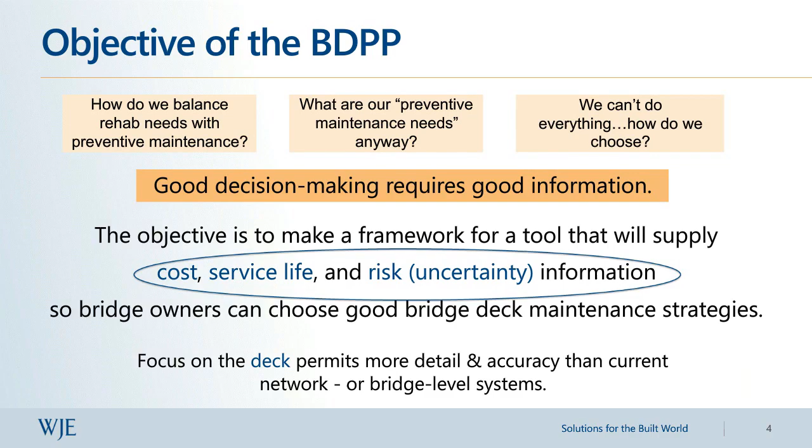As I indicated, phase 1 of the project is completed, and TAC is currently working on developing an RFP for phase 2 of the effort, which will take the framework we've developed here and make it into either a computer-based or a web-based portal for state DOTs and county engineers to access and use.

In this presentation today, I will first discuss the theories and basically the framework that we developed. Then in the second part of the presentation, I will give some examples to illustrate how this logic that we built can be used.

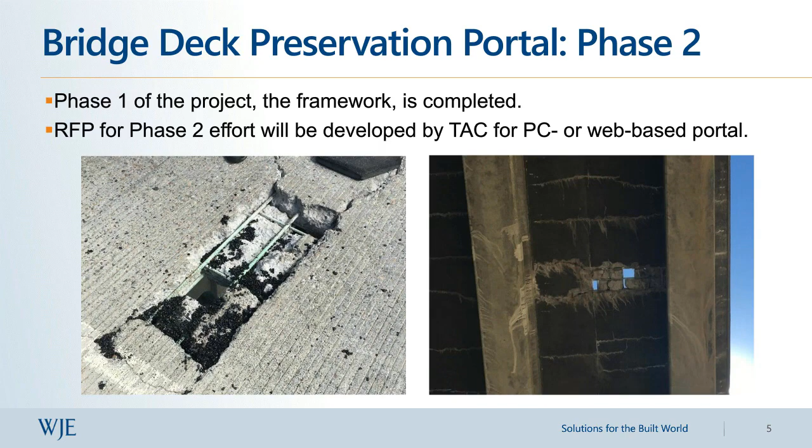So for our tool's general framework, the user will need to collect some information about their asset and basically input it for the tool to work. This will include physical description, exposure conditions, deck condition, and user preferences and constraints.

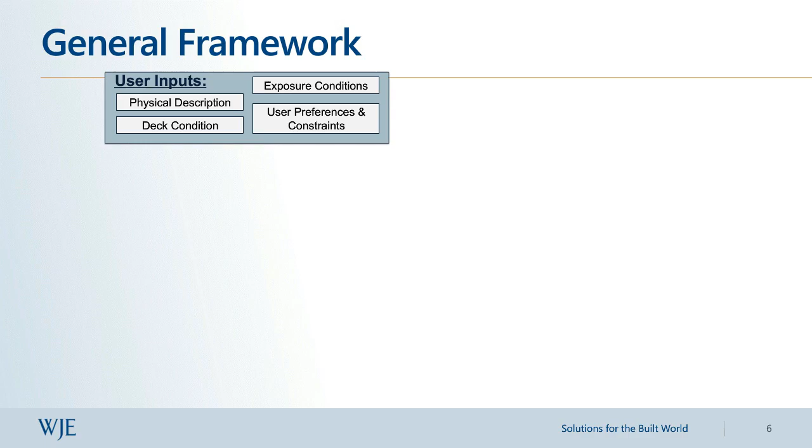Once the user has these inputs in, then we compiled—and I will explain this in detail later in the presentation—a list of all the different maintenance activities that can be used based on the type of the bridge deck or the degradation condition.

So for structural decks, if it's concrete, we focus on collecting maintenance actions for chloride-induced corrosion. If it's steel, we're also focusing on corrosion. If it is timber, we're focusing on decay.

For wearing surfaces, the main deterioration we are targeting here is abrasion or skid resistance. So using the inputs, the portal has brains and logic to basically recommend some maintenance activities to the engineer. The engineer will still be able to add any maintenance activities, even if they are not recommended by the portal, in the analysis, or take out some of the maintenance activities that were recommended by the portal, but the engineer

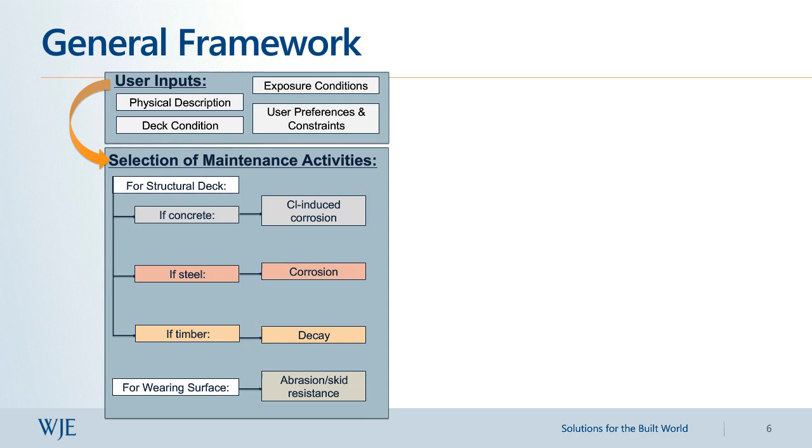doesn't want to consider. And once you have the user inputs and the maintenance activities, then the portal has some algorithms to calculate some of the specifics about the analysis. And these are basically the service life extension estimate. So for each maintenance activity, there will be a calculation of how much service life that activity will extend your bridge with. And then this combined with deterioration modeling can give you a full picture of how long your bridge deck can remain in service using these different maintenance activities.

And finally, we can do a life cycle cost analysis. The results from all these three algorithms are then compiled into an optimization module. And from here, the portal will develop some outputs for the engineer. These outputs will include a list of maintenance activities that are ranked by life cycle costs, agency costs primarily or user costs, service life extension, initial cost, and data variance as well.

One thing to note is data variance will be an output because we are using a probabilistic model, and we are doing probabilistic analysis in this study, and I will explain this later on, which will basically start with a service life extension estimate, which is a probabilistic algorithm.

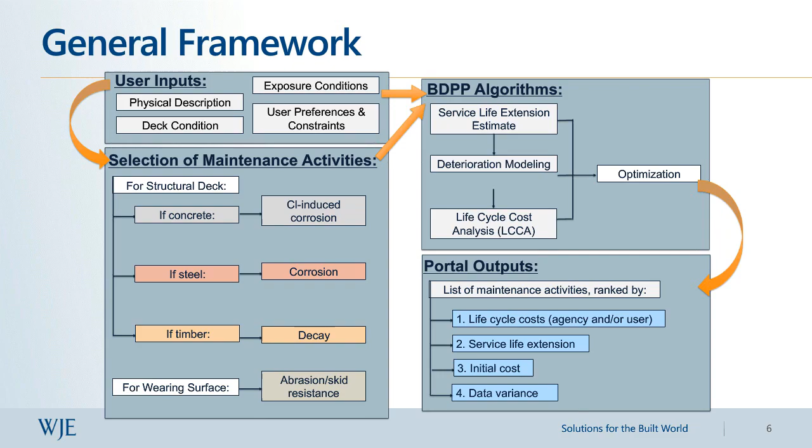So first, starting with the inputs, here I have some of the inputs that the portal needs to work. Starting with physical description, for example, the portal will need the year at which the bridge deck was constructed. And this will be mainly used in the DM or in the deterioration model module. We have other inputs here, which is the structure type, the surface area, and so on.

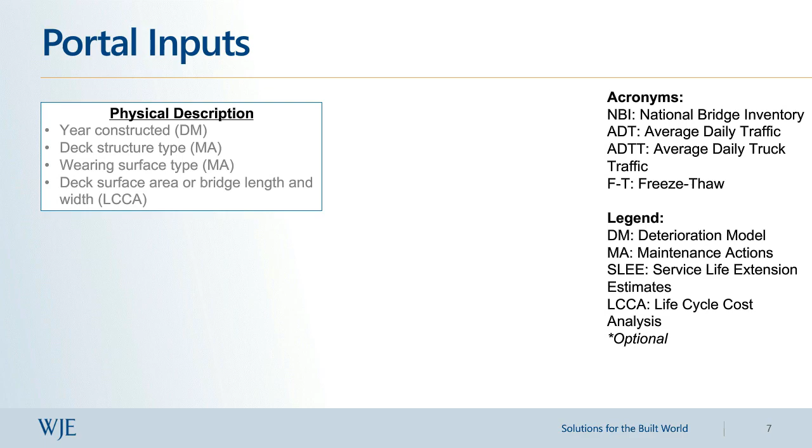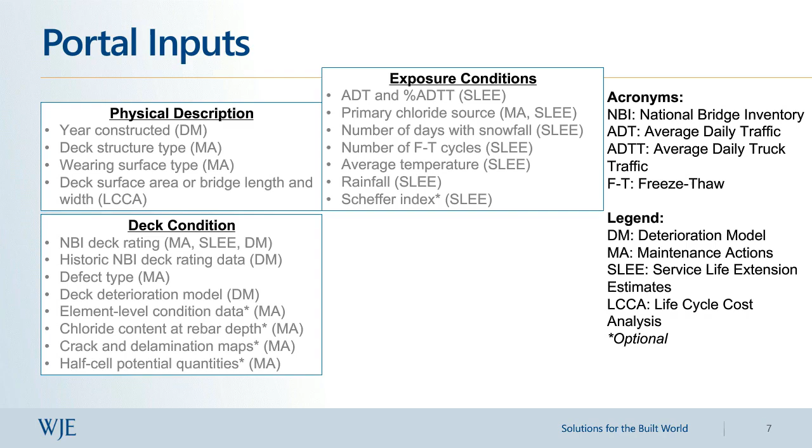Then we will also need some information regarding the deck condition. So, for example, we need the inspection or the NBI deck rating, and this will be used in selection of the maintenance actions and the service life extension estimates, and also in the deterioration model algorithm. Then we need information regarding the exposure conditions, which will basically be used in the service life extension estimate algorithm.

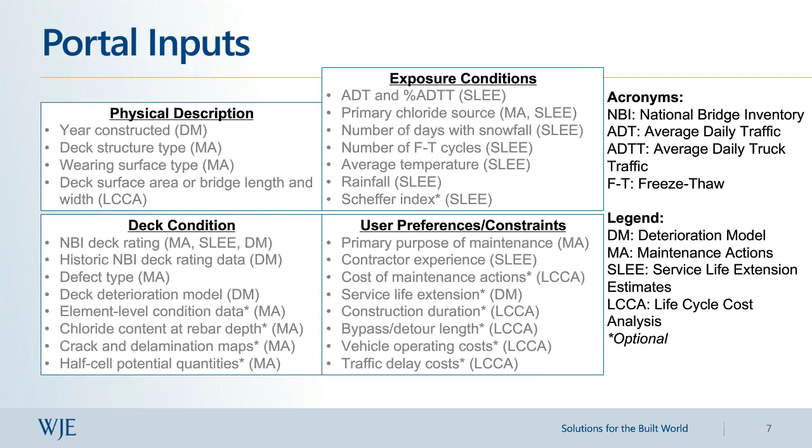And we also have user preferences and constraints. And you can notice that some of these inputs with asterisk are optional. So the portal will still work if these inputs were not put by the user. However, we recommend that as much information as we get will improve the results that the portal will output.

So once you have the input, one of the main efforts that we completed during this project was basically compiling a database for all of the different maintenance action techniques that can be used for bridge decks. And again, we divided those per structure type, as I'm showing here. So for concrete decks or wearing surfaces, we have 5 maintenance actions that we collected. For asphalt wearing surfaces, we have 3 maintenance actions. For steel decks or timber decks, we have 4 for each. And for overlays, we have a total of 10 different maintenance actions that we included in the database that's also included as an appendix in the report.

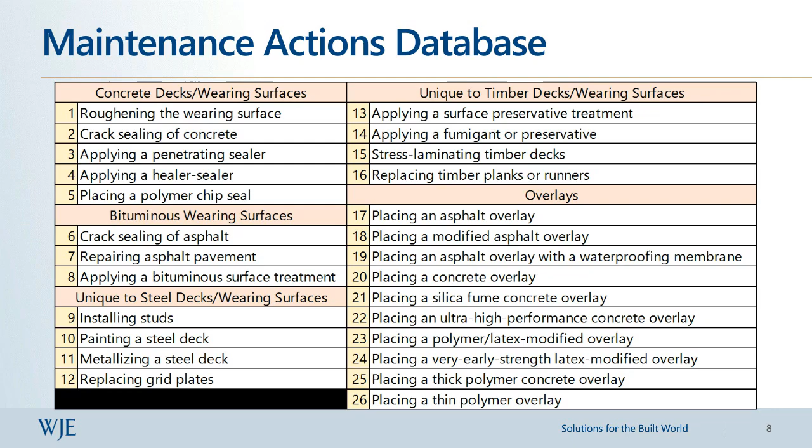So for each of the maintenance actions, we built what we call the maintenance profile. I'm showing here the example for placing a concrete overlay maintenance action. So each action will include general description and general procedures for applying that maintenance action. We also collected unit cost information from the literature. This will basically be used in the life cycle cost analysis.

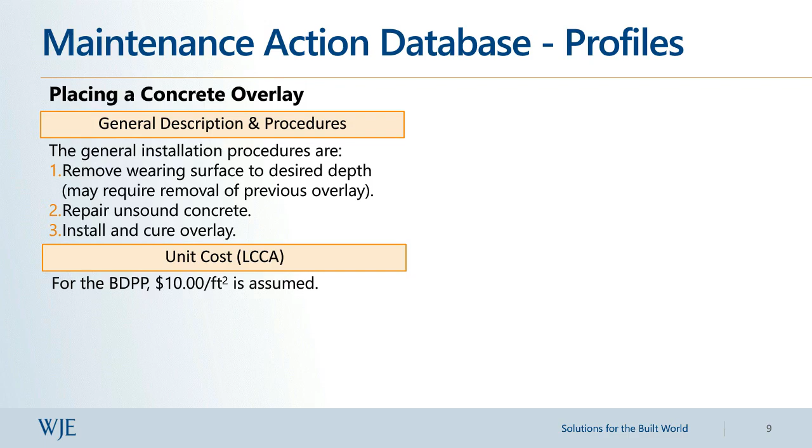One thing to note here is that cost information is very important because it's a big part of the decision-making process, and therefore we recommend that each state compiles their own cost information in a database and use it in this portal, because basically in the literature we found that there is a very large variance in the cost between different states depending on how much they use a certain maintenance activity.

And then we also collected service life information, which we basically found for this one is that there is a range. So the literature will say if you apply a concrete overlay, that will give you between 15 and 30 years for the service life extension. And I will show later how we are using this information. And then we have some exclusion filters, and this is basically the logic that the portal will use to recommend or exclude maintenance activities based on the inputs of the user.

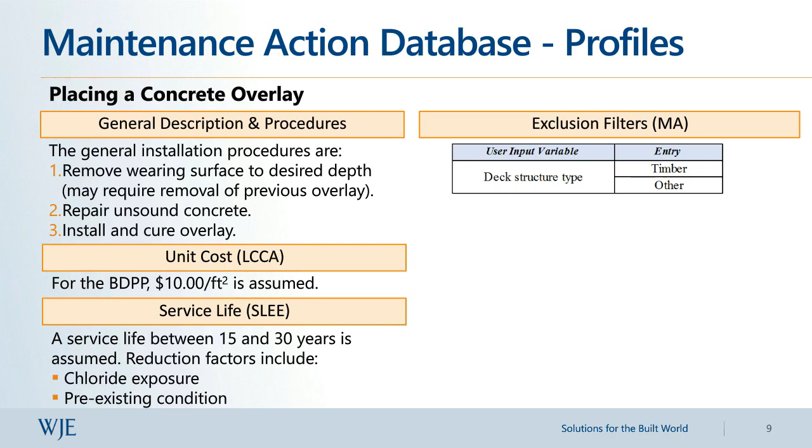And finally, we also included some thresholds for element level inspection data, and we got this mainly from the NCHRP 14-36 report, which was completed by Dr. George Hearn from the University of Colorado Boulder.

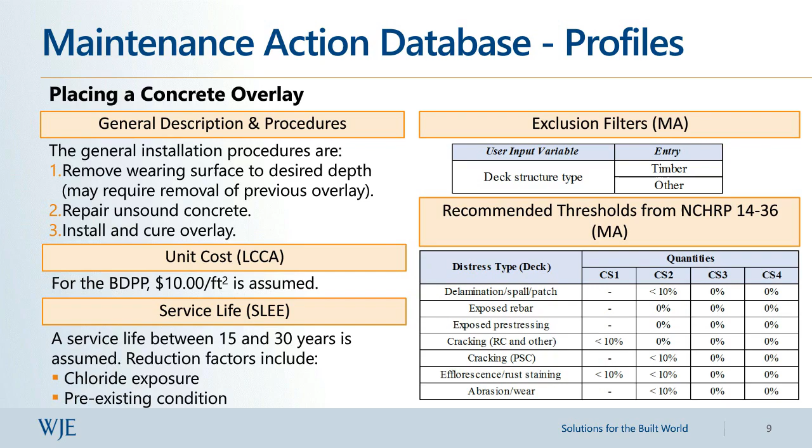Here I'm showing an example of exclusion filters. We have this for all of the different maintenance actions that we have for our portal. But as an example, for applying a penetrating sealer, if your NBI condition rating is 6 or 5, the portal will not recommend this action. And even if the portal doesn't recommend the action, the user will still be able to select that action for further analysis if they would like to.

Same thing with the primary purpose of maintenance. If the user inputs that the primary purpose of maintenance is to improve the ride quality, then applying a penetrating sealer, based on our engineering judgment, won't help, and it will not be recommended to the user. But again, the user can still select that action if they would like to.

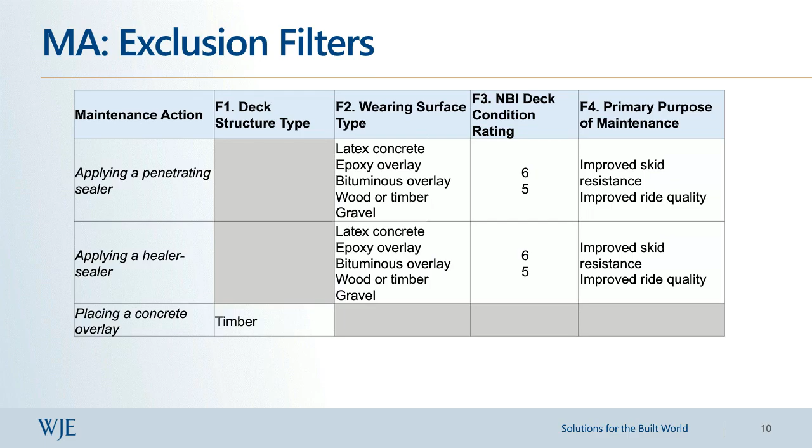Once you have your maintenance activities selected, a big part of this will be to know the service life extension that you can get from each of the maintenance activities. As I indicated earlier, from the literature, we found that for each maintenance activity there is a range. The assumption is if you apply, for example, a concrete overlay and your bridge deck condition is fair or good, and you don't have a lot of chlorides in your bridge deck, and the traffic is not too high, and your de-icing practices are not very severe, then you can get the 30 years service life extension that we found in the literature as the upper bound.

However, if your conditions are severe, you have high traffic, you have high chloride exposure, then probably your service life extension will be more towards the lower bound, which we found from the literature was 15 years. So what we developed here is an algorithm that, based on your exposure condition and the pre-existing condition of your deck, takes reduction factors and uses them to reduce the upper bound of each of the maintenance actions, and then compares that to the lower bound so that the multiplication of the reduction factors times the upper bound is not less than the lower bound.

One thing to note here is that the reduction factors I have listed here will not be used with all the different maintenance activities. For example, you may only use 4 reduction factors for concrete overlays. The reduction factors that we selected are one for traffic loads, which we call FADTT, and one for chloride exposure. We have a reduction factor for the pre-existing condition or the NBI rating of the deck. We have a reduction factor for the freeze-thaw cycles experienced by the deck. We have a reduction factor for the contractor experience. We have one for Scheffer index, which is mainly used for timber bridges. And we have a reduction factor for the average temperature and also the average relative humidity.

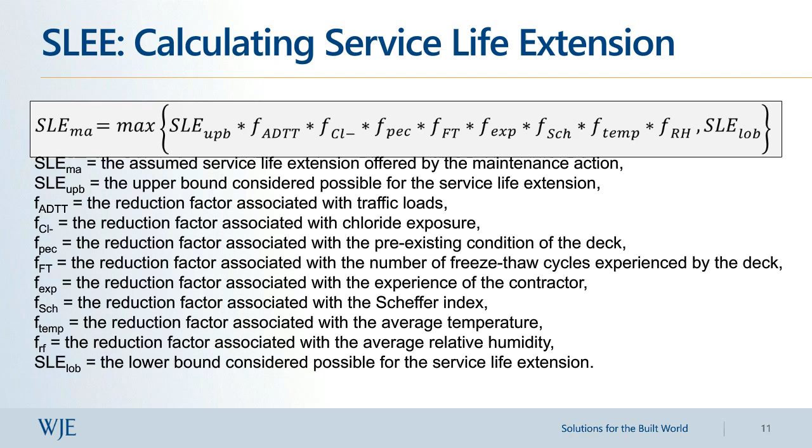So taking an example of chloride exposure reduction factor, we have 3 categories for this: low exposure, medium, and high exposure. The low exposure is when you don't have chlorides, or you're using deicers for less than 5 days in a year. And in this case, the reduction factor is 1, meaning we don't reduce your service life estimate for your maintenance technique because your exposure is low.

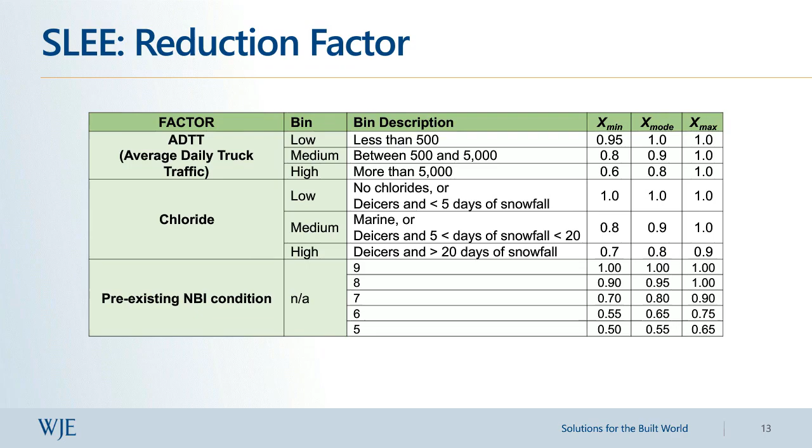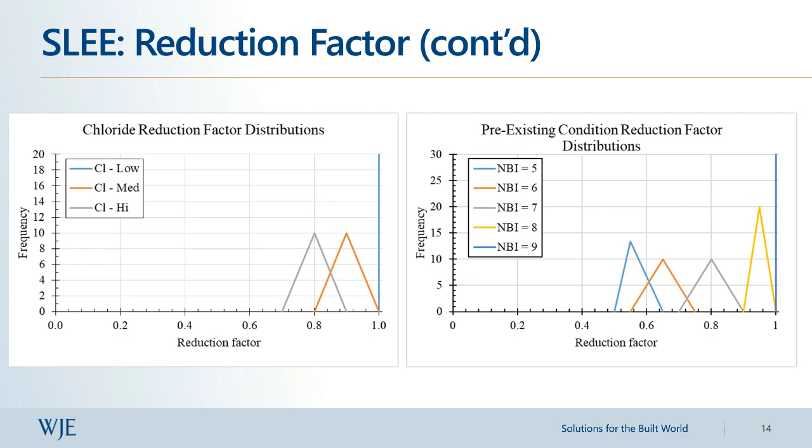When we looked at this, we found that there are 2 drawbacks for doing it this way. So the first drawback is we don't know how much improvement in the NBI rating we'll get. What we found in the literature is when you apply a maintenance activity, you basically extend the service life of your bridge for a number of years. And then the second part is that we know that when you fix your bridge or when you put the overlay, you are effectively reducing the deterioration rate. So it doesn't make sense to use the same deterioration rate as the original line.

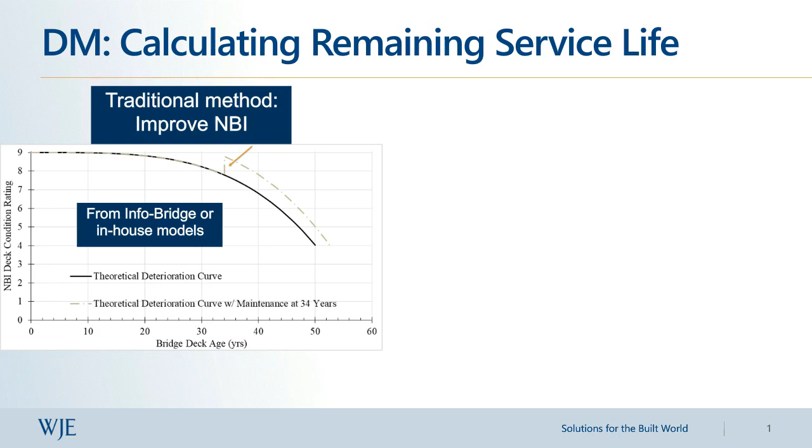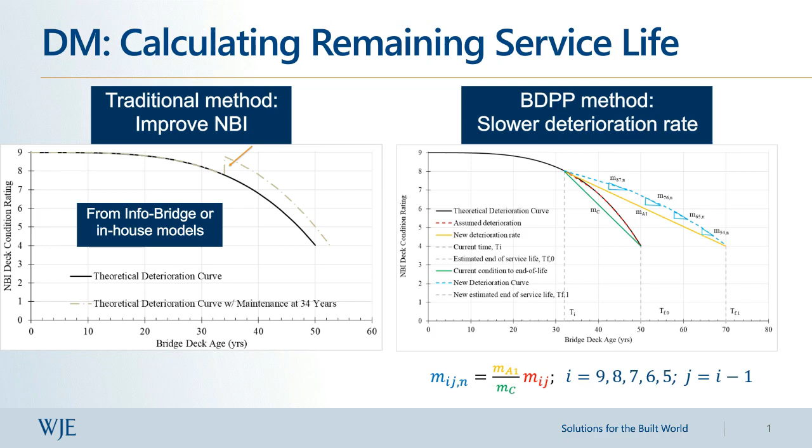If I take the ratio between these two deterioration rates, the new deterioration rate after applying the maintenance activity and the old deterioration rate if I do nothing, and multiply it by the black line, I can calculate this new blue deterioration curve, which is the deterioration curve of my bridge after applying my maintenance activity. So by doing so, we can basically get the service life extension, and we can also back calculate an improvement in the NBI condition as I'm showing in this figure. And then we can use some of these parameters in the optimization and in the selection of the maintenance activities.

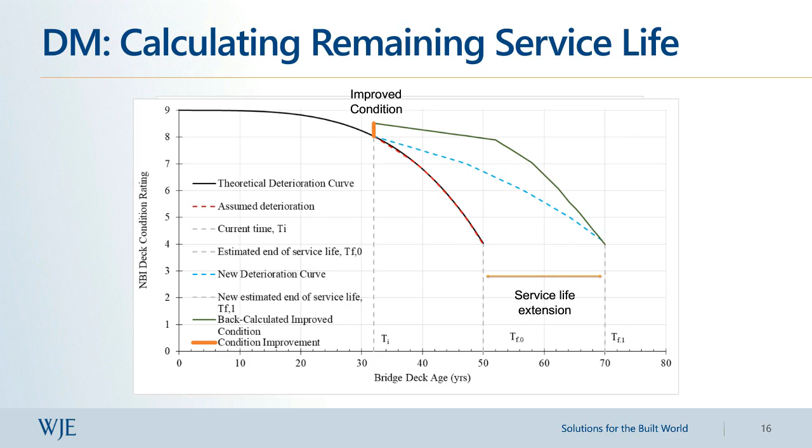Once you have this information, we can then do a life cycle cost analysis. And for this part, this is already well established. We looked at the literature and found that you can do the life cycle cost analysis using the agency costs. And sometimes people include the user costs, which is considered a good practice, and we recommend that it's being done.

However, for this, what you do is generally you have a maintenance plan. So you apply maintenance activity at a certain time. Then after 20 years, for example, in the future, you apply another activity, and then you replace the bridge. And you're basically looking at a certain time frame. Typically 100 years is what we are assuming in our project. And what you do is that you calculate all these different maintenance activities and replacement activities. You calculate how much they are in the future, and then you translate all this to what we call the present value, so the present costs right now, and you can compare different maintenance activity profiles using this technique. And I will show this later on in the examples too.

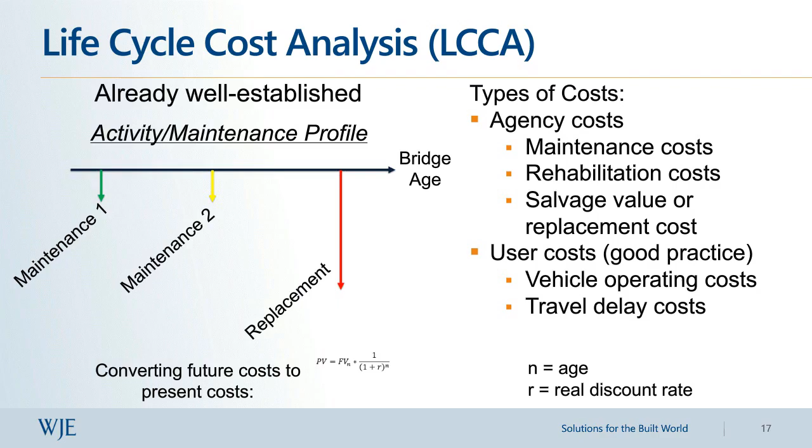Again, as I mentioned, we are doing all this in a probabilistic fashion, and what we recommend to use to do this is a Monte Carlo simulation. We're mainly following a probabilistic technique because we have uncertainties regarding the remaining service life due to inaccurate descriptions of exposure conditions, the assumption that we may have some compromised construction quality, and some inaccuracies inherent in the deterioration model.

Our main probabilistic analysis is conducted in the service life estimation algorithm, and then it goes on to the deterioration model and the life cycle cost analysis. We can have another level of complexity and probabilistic analysis if we want to put the costs also as a probability distribution. However, when we did the examples, which I'll show later by building a MATLAB code to do these analyses, we only considered uncertainty in the service life estimate, and we took the cost as just a deterministic value.

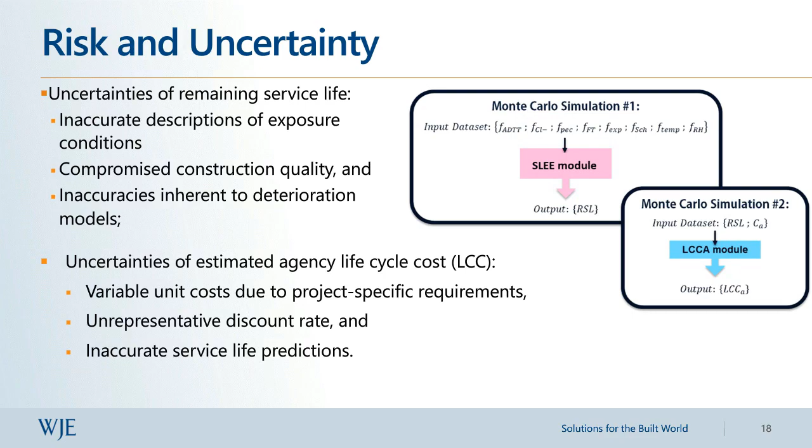Finally, the portal can optimize all these results based on the objectives that the user needs. We define 3 objectives here: minimize the life cycle cost of the agency, minimize the life cycle cost of the user, and maximize the remaining service life. The user can choose one of these objectives to optimize on, or we can combine these objectives using the linear weighted sum method, optimizing each individually and then summing this into one function, where the summation of the different weights for each optimization function should be equal to 1. I'll show this in the examples.

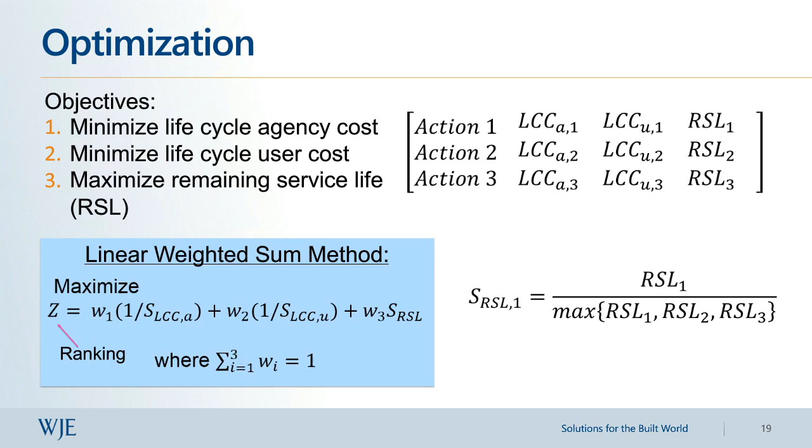Finally, we developed a technique to make maintenance activity plans automated and optimized. We know that in some cases, when preservation is considered for a bridge deck, usually you say, okay, I'm going to put penetrating sealer now, and then after 5 years I'll put an overlay, and maybe after another 20 years I'll put another overlay. In this case, you're not only considering the immediate action, but actually considering a whole maintenance plan through the service life of your bridge deck.

There's a way to do this, shown here: after the user inputs data for the bridge deck, the portal takes this input and goes through the filters and threshold module to choose some maintenance actions. For maintenance activity plan 1, it will be action 1.1; for maintenance activity plan 2, it will be action 2.1, and so on. Then these get put into the service life extension and deterioration model algorithm, generating new inputs, and go back to the filter and thresholds module to do actions 1.2, 2.2, and so on. So the portal can build maintenance activity plans and compare and optimize based on the whole activity plan rather than just the immediate preservation action.

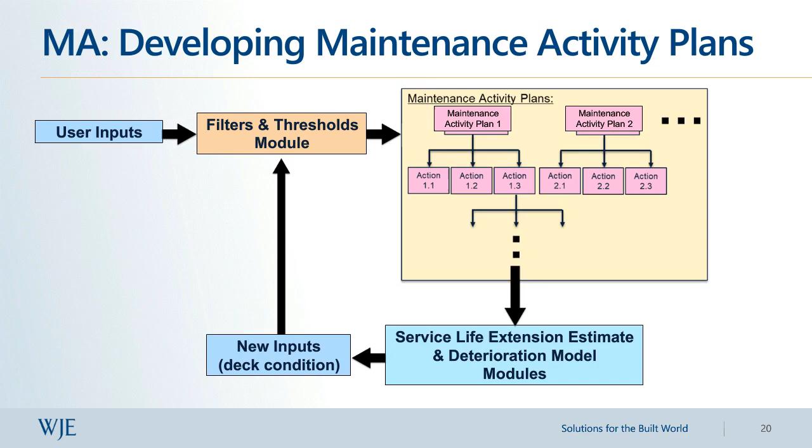So now going to the examples. Early on in this project, when we met with the TAC, we decided it might be a good idea that after we develop the logic, we run some examples to test it. We got 3 bridges from North Carolina DOT, Iowa DOT, and Oregon DOT, and did the analysis for all of them.

In order to do so, we had to build a tool to do the analysis. So we built, or completed, a MATLAB code that can do the analysis I described as an example, and ran all these example bridges to get the results, which I will show here. One thing to note is this is a preliminary tool - it's not complete, so there are some limitations to what we can do, but the service life extension, the deterioration model, and the life cycle cost algorithm are basically similar to what I showed in the previous slide.

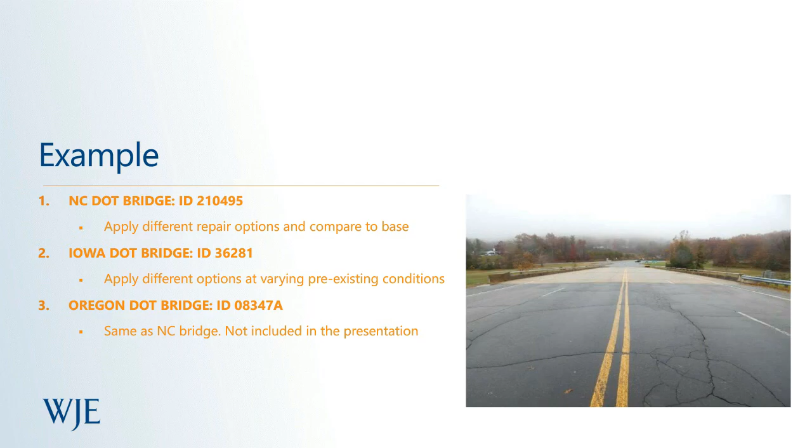So for all the examples where we only considered a concrete bridge deck, we selected 4 maintenance actions to be analyzed. In doing so, we didn't have to build a whole maintenance selection algorithm because we already know what actions we want to consider. And we calculated the life cycle costs for agency costs only, to keep it simple.

We considered 100 years for the life cycle cost analysis. The 4 maintenance actions we selected are a healer sealer, a hot mixed asphalt overlay with a waterproofing membrane, a concrete overlay or PCC or high-performance concrete overlay because they have similar characteristics, and a thick or pre-mixed polymer concrete overlay.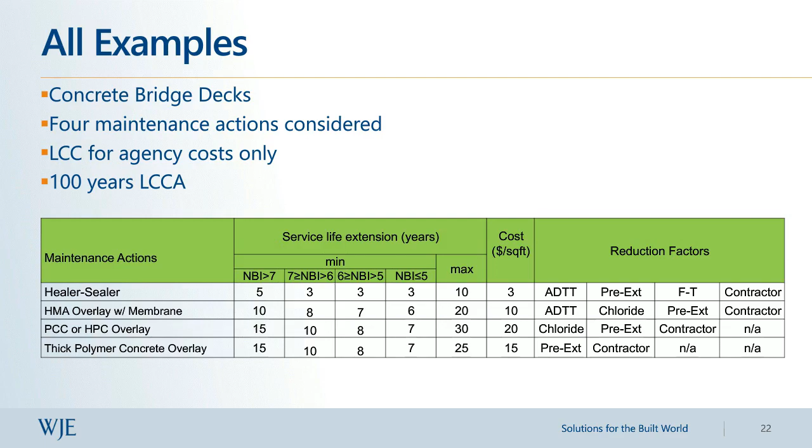We ran 3 examples, but for the sake of time in this presentation, I will only present the North Carolina and the Iowa DOT bridges.

For the North Carolina bridge, we got the inputs from InfoBridge, a website that FHWA has with all the information we needed. You can also get this information from inspection reports. For this bridge deck, the year constructed was 1979. It was built using concrete cast in place. We got the length and width information, and then the location and exposure conditions.

They used deicing salts for this bridge. The chloride exposure was medium, and the freeze-thaw exposure was low. We had the ADT and percent ADTT information to calculate the reduction factor for traffic loads.

We assumed the contractor experience risk is low, meaning the contractor is experienced in all the methods, so we don't need to put a reduction on the service life estimate due to inexperience of the contractor. We got the deterioration model, which is now available on InfoBridge, but at the time of this project, we got it from the LTBP portal. This is the deterioration model for the bridge deck.

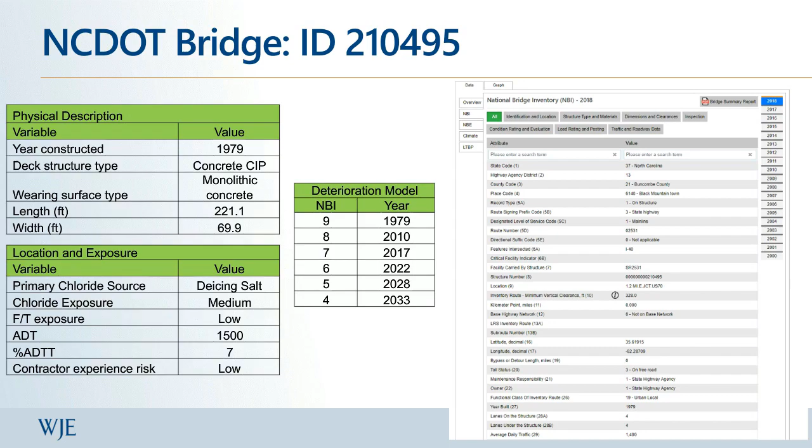We ran the example in our MATLAB program, and here are the results for the healer sealer and the HMA with membrane. The red line is the original deterioration curve of your bridge deck if you don't do anything. However, if you come at year 2019, which is when we consider the maintenance activity, and apply a healer sealer, you get about 6 years of extension, shown as the blue line. You'll notice there are two purple lines around the blue line.

These are the upper and lower bounds, because this is a probabilistic analysis, so you get a range of results. These are basically the 10th percentile and the 90th percentile, and the blue line is the average, or the 50th percentile. Same for the HMA with membrane, but you'll notice we got more service life extension — instead of about 6 years, we're getting closer to 10 years.

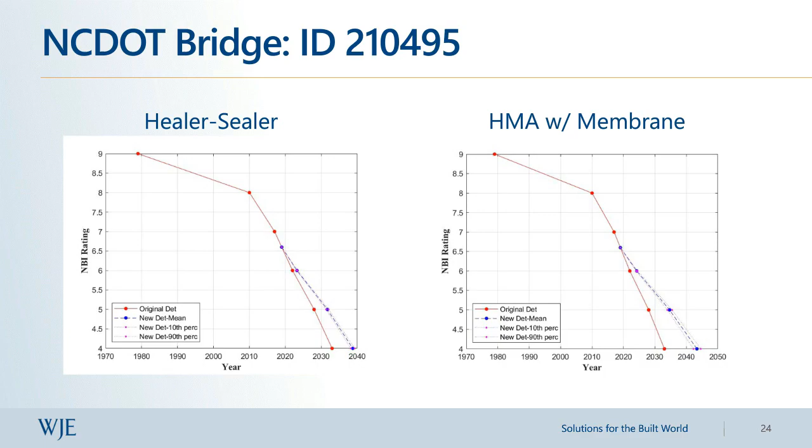For a concrete overlay or a thick polymer overlay, we did the same analysis. However, for this you get a longer service life, because an overlay gives you longer service life.

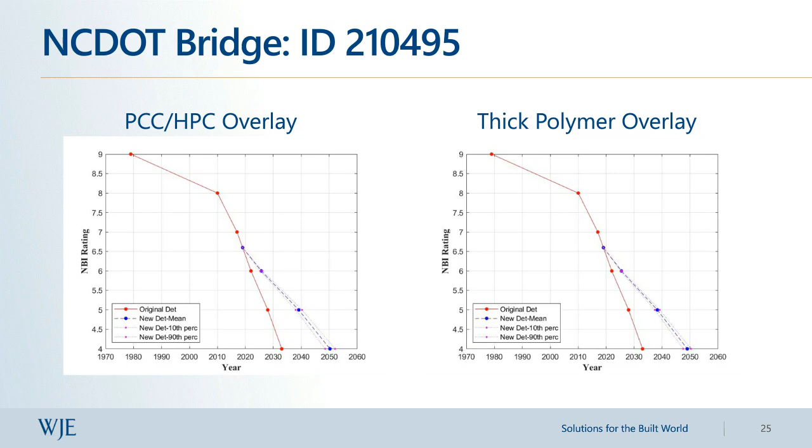Once you do this, we can do the life cycle cost analysis. We assumed, again, 100 years, and for our life cycle cost analysis, we assumed that once the bridge deck reaches the end of its service life, it will be replaced. Then after 54 years, which is the new life of the bridge deck assumed equal to the old life, you will replace it again.

So if you do nothing, after 14 years you reach the end of your service life, which we assume to be an NBI rating of 4 in our case. So you replace your bridge, then after 54 years you replace it again, and then after 32 more years you reach the 100 year analysis period, so you can calculate the salvage value and use this information to calculate the life cycle cost.

If you put on the overlay, instead of having to replace the bridge after 14 years, you extend that service life by 16 years, so you replace it at 30 years. Then after 54 years you replace again, assuming you don't do anything else, and then after 16 more years you reach the end of the analysis period, where you can calculate the salvage value and the life cycle cost. You can do that for all the different maintenance activities.

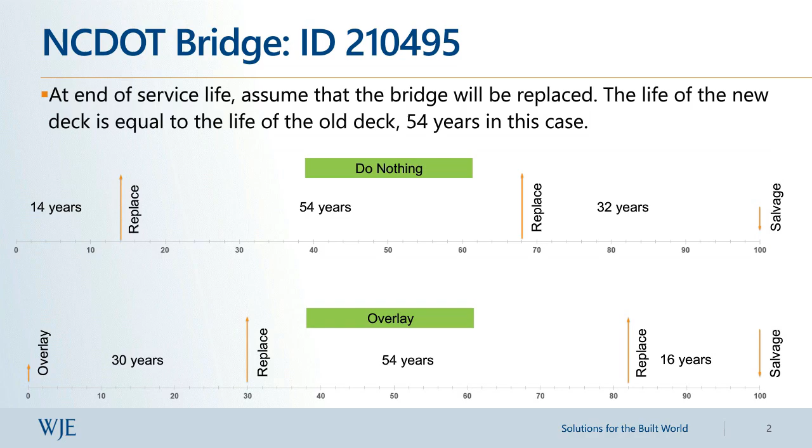So here I'm showing an example of the different variables or results you get for a healer sealer in this case. Do nothing is always there, it's always an option, it's default. Then the healer sealer results are shown here for the 10th, 50th, and 90th percentile. For comparing all the different maintenance activities, we will choose the 50th percentile moving forward, but depending on how conservative you want to be, you can choose the 10th percentile, which is most conservative, or the 90th percentile if you want to be less conservative. The outputs we get are the undiscounted sum, the present value, which is one of the things we use for our optimization, the improved NBI condition, which is a theoretical number, the remaining service life, which is the second factor we choose for the optimization, service life extension years, and the initial cost.

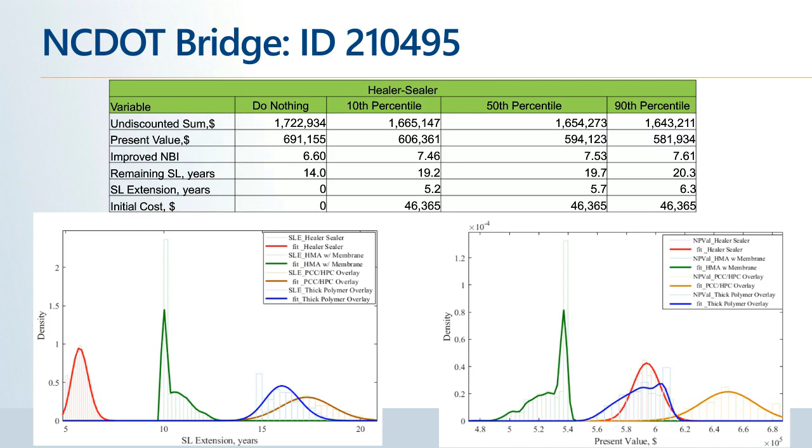So here is one of the outputs you will get from the portal, which is a simple chart. If you just want to select a maintenance activity or the cheapest maintenance activities that can give you a certain number of years, for example if you only want 10 years out of your bridge deck, you can go to this chart and see that these three options, the HMA with overlay, the thick polymer concrete, and the concrete overlay can give you 10 years or more. If you want the cheapest option, you can choose the HMA with a membrane. If you only want 5 years, you can even go to the healer sealer and choose it as your maintenance activity. So this chart can be used for quick selection of maintenance actions that give you a certain number of years for service life extension.

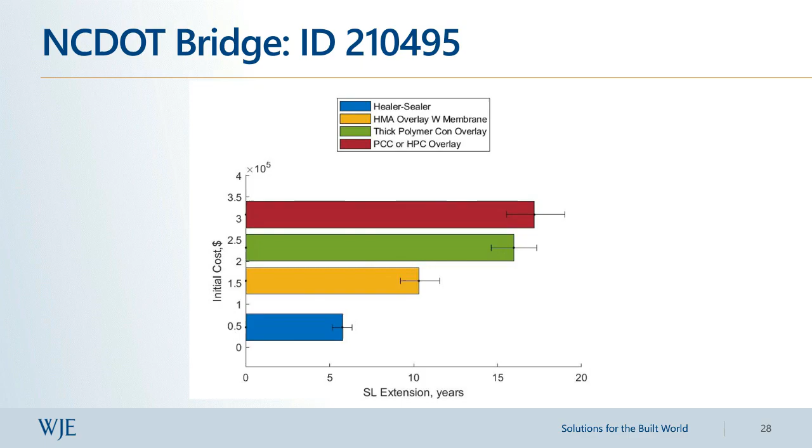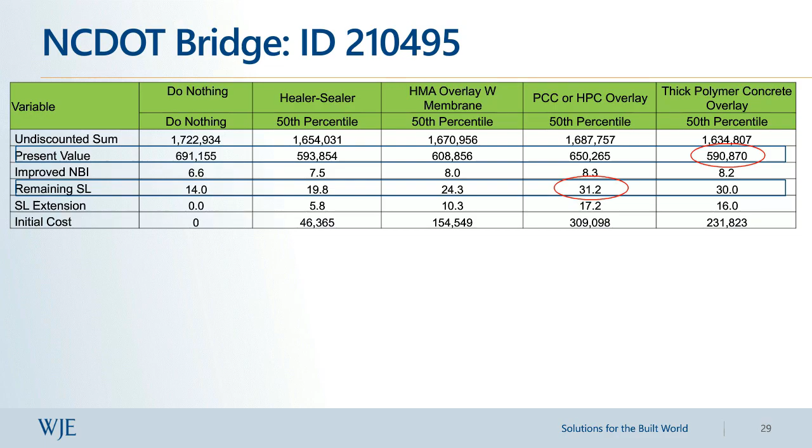So if I do the optimization for the present value, you can notice that the thick polymer overlay is 1, which is the optimum solution. If I do it for the remaining service life, you will notice that the concrete overlay is 1, which is the optimum solution if I'm looking for maximum service life extension.

I can combine the two, which we did in this table here. If I give them equal weight factors, so each gets 50%, then the optimum solution based on the inputs we have is the thick polymer overlay. If I give a higher priority to the present value, so 75% for present value and 25% for remaining service life, then again the thick polymer concrete overlay is the optimum solution. And if I give a higher priority to the remaining service life, then my optimum solution will be the concrete overlay.

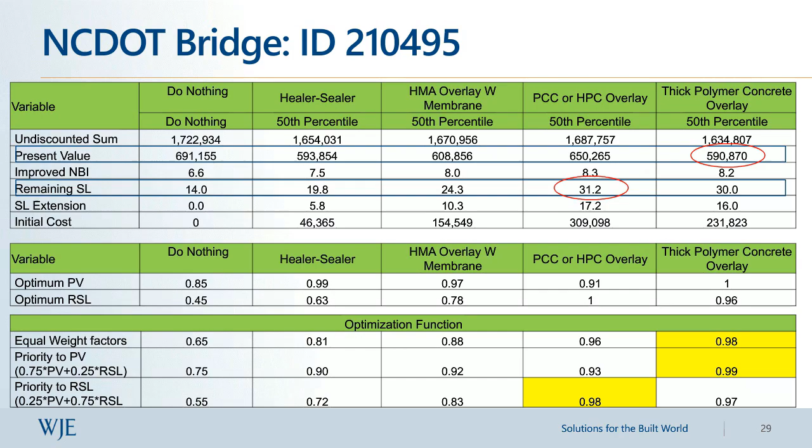So moving to the Iowa DOT bridge, this is actually a newer bridge, built in 2010. Again concrete cast in place, and we have the length and width information. The chloride exposure in Iowa is high, and the freeze-thaw cycling is high. This bridge had a high number of ADT and percent ADTT. And we assumed in this case that contractor experience is variable. So what we said is that contractors in Iowa are experienced in healer sealers and concrete overlay, so these have low risk. However, the HMA or hot mix asphalt with membrane, or thick polymer concrete overlay, have a high contractor risk.

And again, all this information for the inputs you can get from the InfoBridge website.

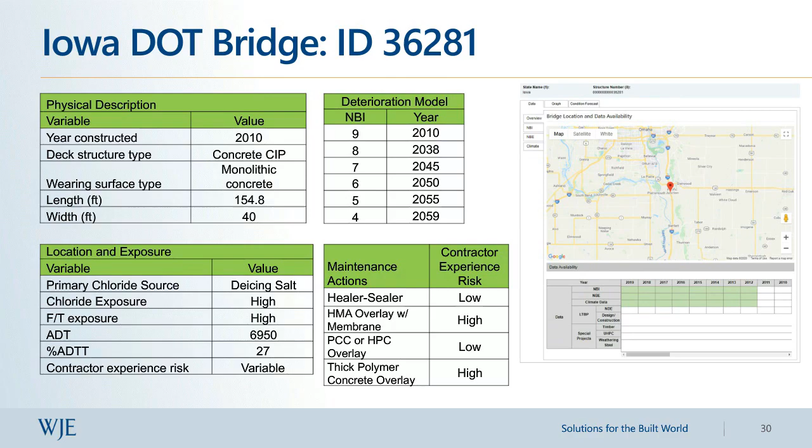And then we got the deterioration model, which I'm showing here. So again, we ran the analysis, but this time we wanted to look at what will happen if I am choosing maintenance activities for the same bridge, but it had different NBI ratings.

So if I am applying a concrete overlay at the current NBI rating, I'm looking at about 25 years of service life extension. If I apply it at an NBI rating of 8, that reduces a little bit, so instead of 25 years, I'm getting like 22 or 23 years. If I apply it at NBI 7, I'm getting even less service life extension, maybe 19 or 18 years. If I apply it at NBI 6, the service life extension is less and less. And if I apply it at NBI 5, you're getting less than 15 years of service life extension.

And this is mainly because of that pre-existing condition factor that we have in our service life extension estimate. As your NBI rating decreases, your reduction factor increases, so that makes your service life lower.

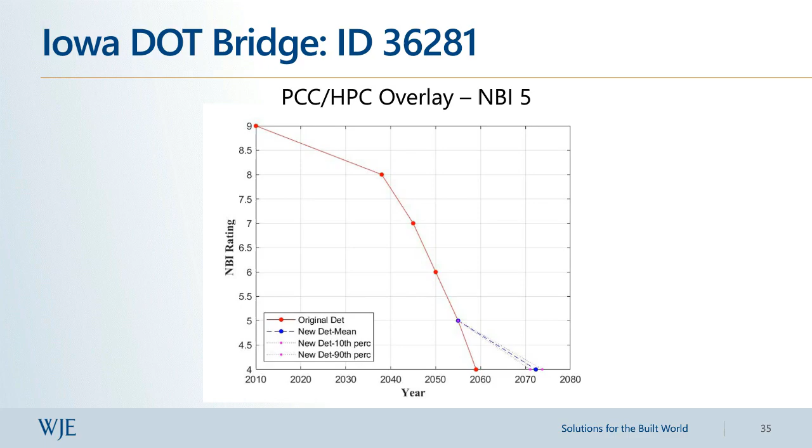So again, I'm showing the simpler chart, which includes information for the initial cost and service life extension. And you can see here the information for a concrete overlay, or thick polymer, or HMA, which is yellow, or the healer sealer. And again, as you apply this at a lower NBI rating, you get lower service life extension.

So I'm showing here at NBI 7, maybe the healer sealer is a little bit over 5 years. Then at NBI 6, the healer sealer actually gives you less than 5 years. And at NBI 5, it's about 4 years. So you get lower service life extension. This is true for all of the different maintenance activities.

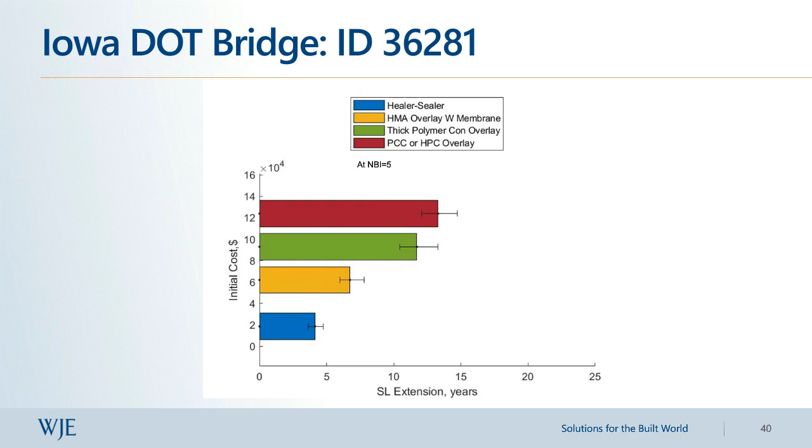Then we wanted to check if the recommendation from the portal will change based, again, on when you apply your maintenance activity with regards to the NBI rating. So for the present value, the healer sealer was going to be the recommended option based on our inputs for NBI rating of 8.7 or NBI rating of 8. Once you go down to NBI rating of 7, 6, and 5, the thick polymer overlay will have the lowest life cycle cost based on our inputs.

For the remaining service life, you can see here that the concrete overlay will almost give you the maximum remaining service life or service life extension, and this is due to the inputs that we have. If you change the inputs based on your condition, or your bridge deck, these results may change as well.

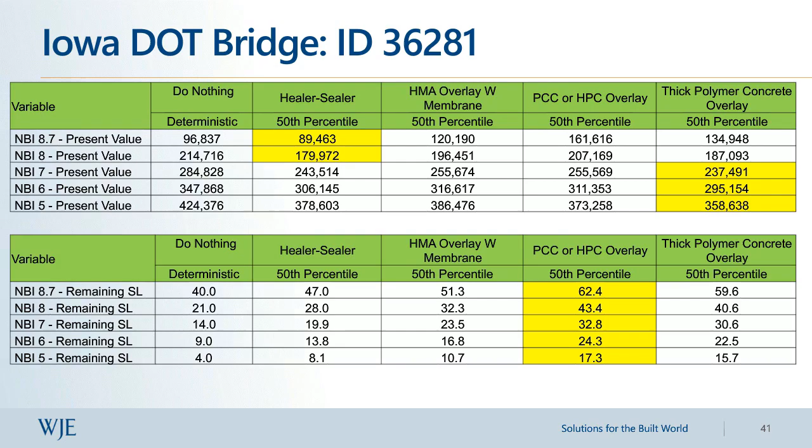And finally, if you want to do the optimization based on different weight factors, so equal weight factors, or priority to present value, or priority to remaining service life, you can see that with changing the NBI rating, the recommendation of the portal will change. Again, that's based on the inputs that we have in this case, with the healer sealer being one of the best options when you have a high NBI rating, but once your NBI rating becomes lower, then the overlays become a better option in this case.

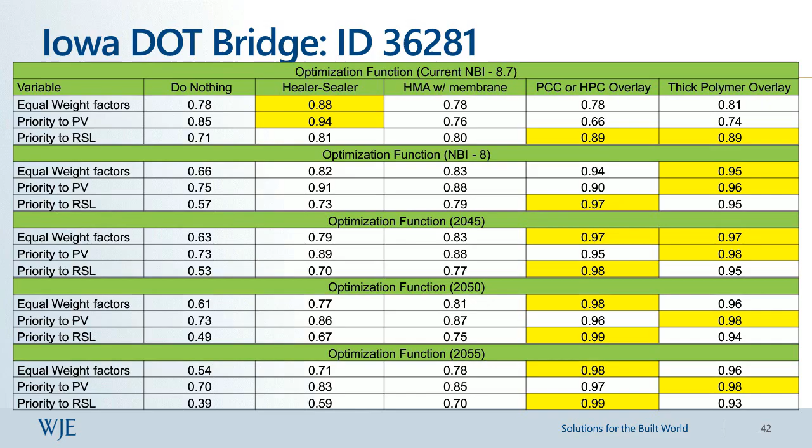So in summary, in this project, we developed a framework for a web-based bridge deck preservation portal that includes cost, service life, and risk and uncertainty information.

WJE developed the following tools as part of the portal. The first one is a database for the different maintenance actions that includes the general procedures, the cost information, the service life extension information, and some filtering techniques for recommendation of maintenance actions.

We built a service life estimation algorithm for the different maintenance actions. This can be used with a deterioration model, such as InfoBridge, to estimate the life cycle extension. However, our portal will have enough flexibility, so if the user doesn't like what we recommend in terms of the service life extension, they can have their own input. So instead of using 20 years for concrete overlays, if they want to use 30 or 35, they can. The user will have complete freedom to have this input. And they can also use their in-house deterioration models if they have them. If you don't have your in-house deterioration models, we recommend that the information from InfoBridge be used.

And finally, we put all this in a probabilistic framework to account for the uncertainties in the inputs and subsequently the remaining service life and life cycle cost. WJE developed a MATLAB-based tool, a preliminary tool, to conduct the examples. We can keep developing this tool and use it in phase 2 or in future projects to compare with the web-based tool if this is the direction we're going.

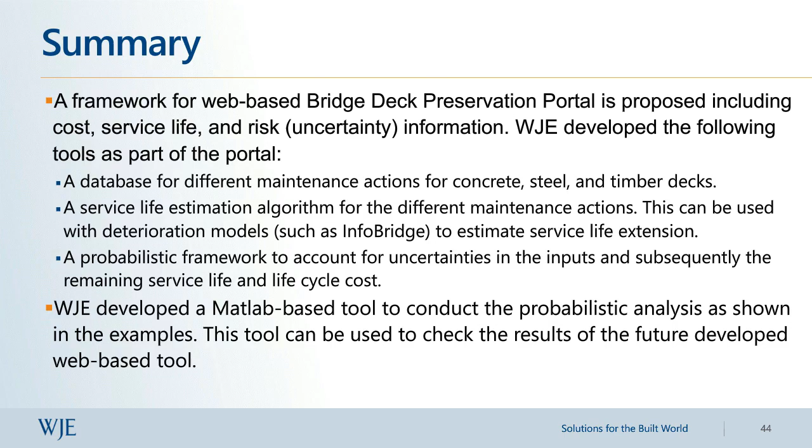So the main outcome from this, in my opinion, is that this proposed framework that we developed here is a project-level tool that can be used to optimize the selection of maintenance actions and plans. And this can lead to optimized management of funds and enhancing the life cycle cost of the assets.

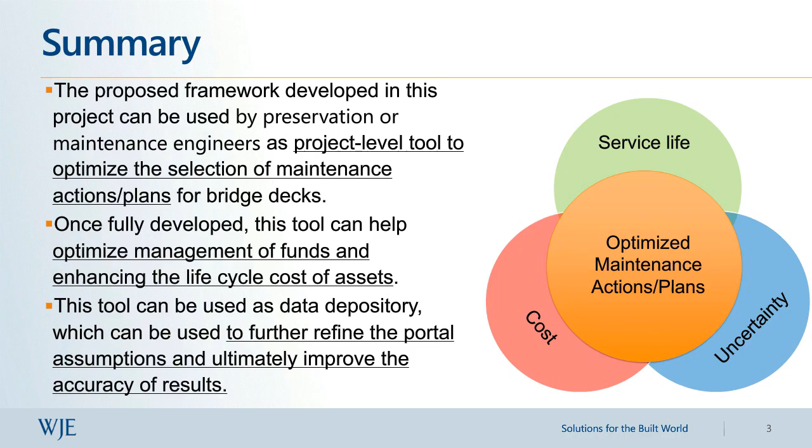The tool can also be used as a data depository in the future, which can be used to further refine the portal assumptions and ultimately improve the accuracy of the results. So what's next? As I mentioned earlier, TAC is currently developing an RFP for the phase 2 effort, which will take the framework that we developed here and make it into a computer or web-based tool.

Maintenance action costs are of extreme importance and have significant effect on the results. We either recommend to conduct a study to collect this cost information for each state, or each state can use values from their bidding items for this case.

The service life estimation algorithm is based on literature search and engineering judgment, particularly the reduction factors. We recommend that a parametric study of the different scenarios be completed because this can refine any of the factors. However, as I mentioned earlier, the user will have complete freedom to input what they estimate for service life extension for the different maintenance actions if they choose so.

Delayed maintenance and optimization of maintenance may be of interest, and this could be further developed if needed. And finally, the developed framework for bridge decks in this case is scalable and could be adopted for other bridge elements, including superstructure and substructure elements.